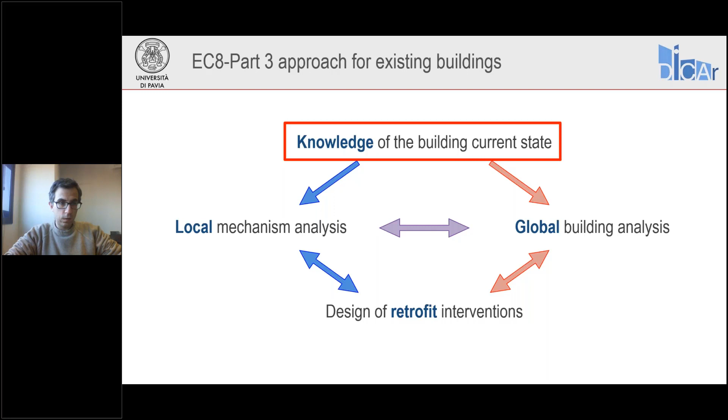So before looking at what Eurocode 8 is saying, I just want to point out why it is important to get knowledge of masonry buildings, and so why it is important to have a proper survey of the building. It is important because, differently from other building typologies, the seismic behavior of masonry buildings is influenced by a really large amount of quantities and factors. For example, it is influenced by the pattern, quality, and strength of masonry.

In particular, it is influenced by materials and by the interlocking between the materials and among the leaves, in case of masonry made by more than one leaf. It is also influenced by the load transfer to foundations, which is a function of the geometry, of plan or elevation irregularity, the distribution of vertical loads, and also a function of the thrust of horizontal elements like roofs, arches, or vaults.

The behavior is also influenced by the efficiency of connection among the elements, such as the interlocking among walls or the wall-to-diaphragm connections. And it is influenced also by the effect of strengthening elements, such as tie rods or ring beams, that can be present. Finally, it is influenced also by the interaction with adjacent buildings.

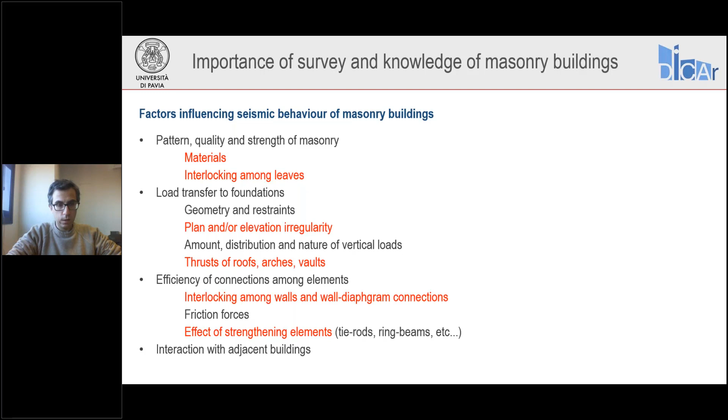Now here you can see some examples of damages during an earthquake due to these factors that I was mentioning. For example, on the left you can see some collapses due to disgregation of masonry, which is not good quality. On the right you can see some collapses due to instability of walls, which are made of double leaves having poor connection.

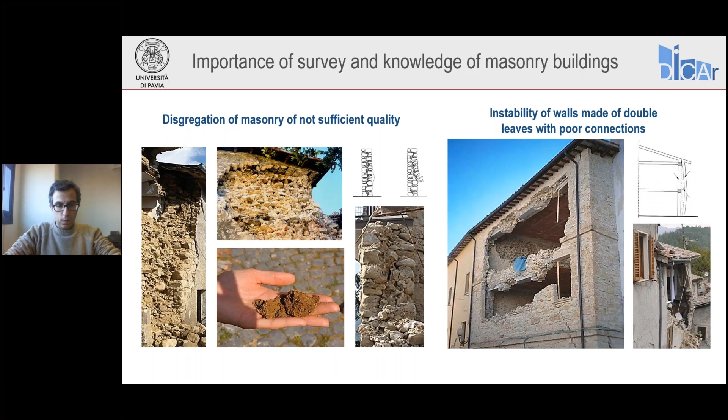Here you can see some effects, some failures due to problems of plan or elevation irregularity. For example, here you can see a collapse of the facade due to plan irregularity, because in this portion of the building there was a big room, so no transversal walls which could potentially act as a restraint of this facade. Here you can see some damages due to elevation irregularity.

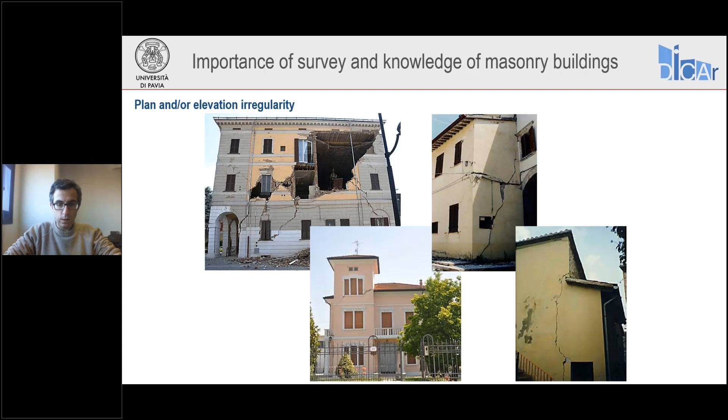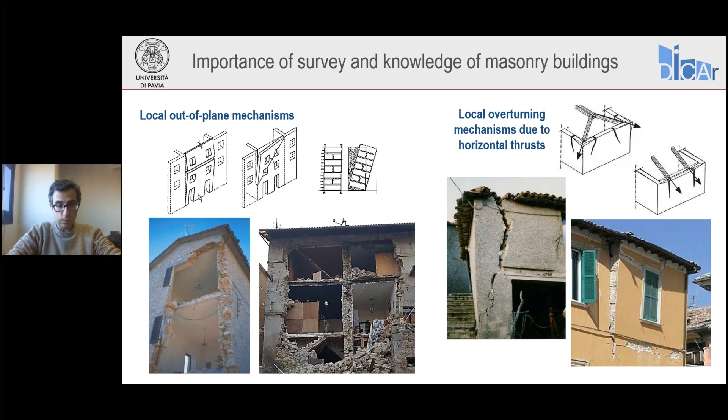Now, in these slides you can see some examples of local out-of-plane collapses, so collapses due to this kind of mechanism. Whereas on the right you can see the effect of possible horizontal thrusts. Here you can see essentially a collapse of a portion of masonry. Now, usually these are the mechanisms that are more commonly taking place in masonry buildings.

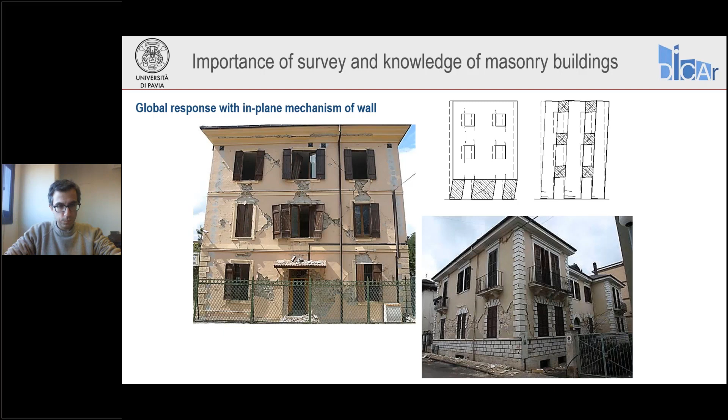Now, how is Eurocode 8 facing the problem of survey and knowledge. First of all, the Eurocode which is facing this problem is Eurocode 8 Part 3, which is the part of Eurocode devoted to assessment and retrofit of buildings.

Now the current version is the one of 2005, which consists of 90 pages, which can be a lot, but actually is not, because those 90 pages are not only relative to masonry buildings, but relative to all structural typologies. Now this code is actually under review, and it is very, very likely that there will be, first of all, a larger amount of information. So probably the new Eurocode will not consist of only 90 pages, but more pages.

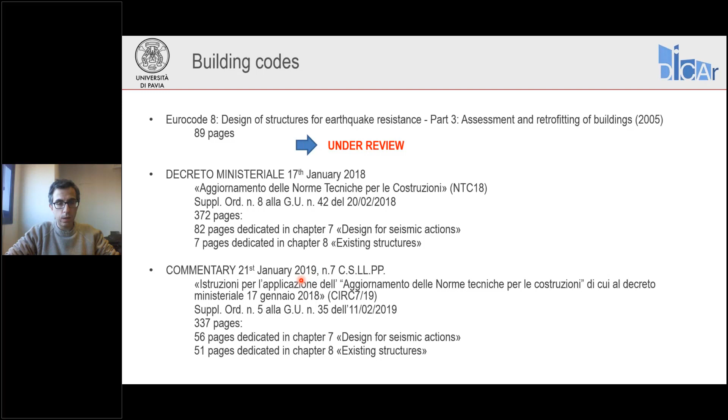And there will be aspects taken from other codes, such as the Italian code that has already been updated. The Italian code, which is the version of 2018, but also its commentary, which was released in 2019.

So what Eurocode 8 part 3 is, in the current version, saying about this problem. The problem of knowledge and survey is faced in chapter 3.

If you look at chapter 3, you can see different sections. The first section regards general information and history. In particular, Eurocode 8 is asking the engineer to collect information on several aspects. The most important are available documentation regarding that specific building, field investigation, and in situ and laboratory tests. It is also stressing the importance of cross-checks between the different sources of information, just to avoid different information from the different sources.

Then there is also a section called required input data, in which Eurocode 8 is setting a list of information to be collected. I want to stress that this section is relative to all structural typologies, not specific only to masonry. Here, Eurocode 8 is asking you to find information regarding the structural system, the dimension of the building, and the structural elements which are resisting the loads. It's asking you to collect information regarding the mechanical properties of the material, plus a list of other information such as possible material weaknesses, inadequate detailing, and so on.

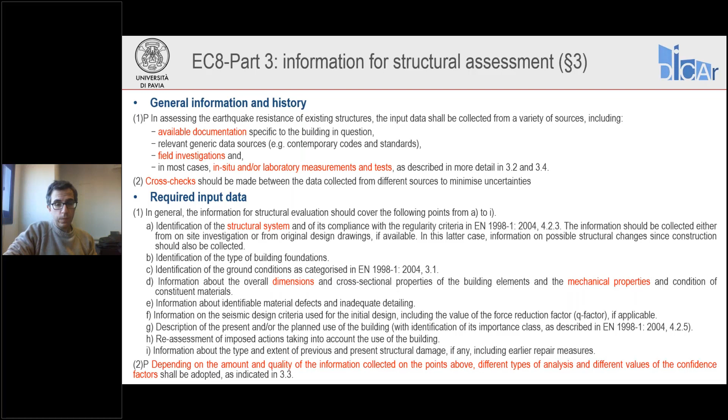Now, the most important sentence of this part is the last one, which says: depending on the amount and quality of information collected, different types of analysis and different values of the confidence factor have to be adopted.

Eurocode 8 is then introducing the concept of knowledge level. Knowledge level represents simply the amount of information, the amount of knowledge that the engineer is getting on the building to be assessed. There are 3 possible levels of knowledge, ranging from 1 to 3. KL1 is the limited knowledge level, KL2 is the normal knowledge, and KL3 is the full knowledge. So increasing the number means increasing the knowledge on the building.

The factors that are influencing the different knowledge levels are essentially 3: geometry, details, and materials. Now all this information is somehow summarized in this table, which is table 3.1, which I'm going to comment on here and in the next slides.

Regarding the geometry, of course, it is represented by the geometrical properties of the structural system. Details can include, regarding masonry buildings especially, connection between floors and diaphragms, connection between walls and diaphragms, property of joints, and for other structural typologies such as RC buildings, also detailing information regarding their reinforcement. The materials are represented by the mechanical properties of the material of the building.

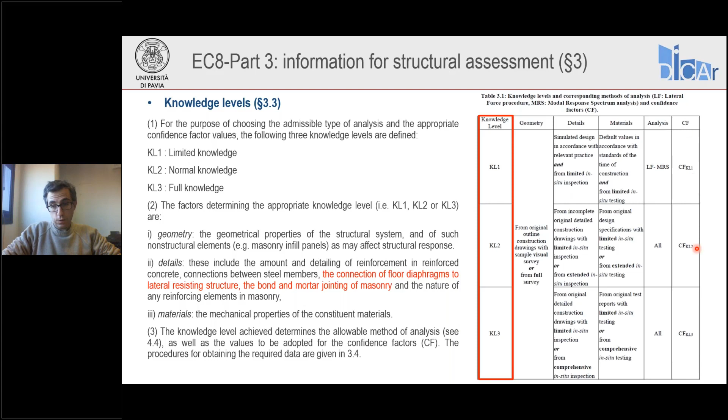Now, what is the meaning of knowledge level? The meaning is this: if you move from KL1 to KL3, you increase the extent of investigation, and so also the cost of investigation, but you reduce the uncertainties. So moving from KL1 to KL3, in theory, you're going to a less conservative assessment. It doesn't mean that moving from KL1 to KL3 you are necessarily increasing the cost, because potentially if you move to KL3, the amount of retrofit that you need can be less.

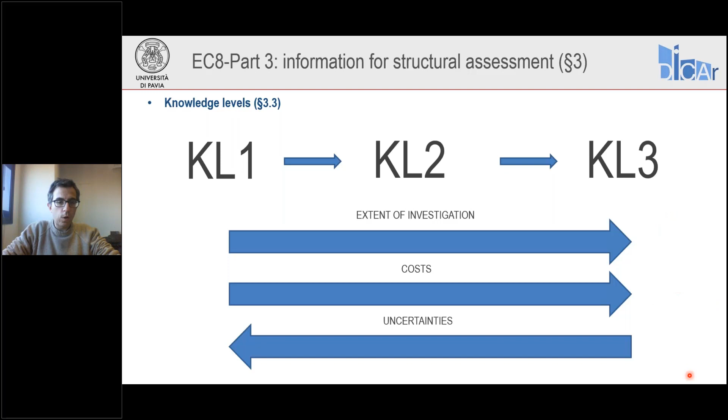So these are the costs of investigation, not the total cost of the interventions. Now it is the engineer that has to find a balance among all these aspects and select the proper knowledge level.

Now let's comment on table 3.1, looking at the different columns. Regarding the geometric survey, Eurocode 8 is introducing 4 definitions. Outline construction drawings are documents that can describe the geometry of the structure, allowing for the identification of the structural system, essentially, and the dimension of the different elements.

Then it is introducing the detailed construction drawings. These are essentially the same as the outline construction drawings, but in addition they have information regarding details. Then Eurocode 8 introduces the concept of visual survey. A visual survey is a procedure where the engineer checks the correspondence between the outline construction drawings and reality. He's not checking all the elements, but probably, for example, the dimension of the most important elements.

Finally, there is the concept of full survey. Full survey is like the visual survey, but is extended to the whole building, and the aim of this survey is to produce structural drawings. It is used when these kind of drawings are not available, or when you want to reach the full knowledge of the building.

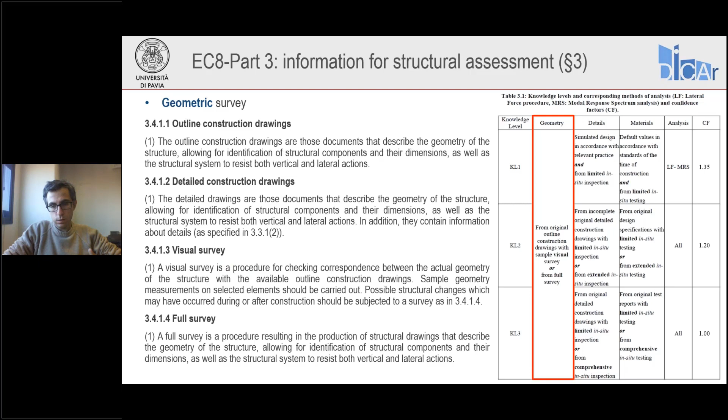Now, regarding the detailed investigation, Eurocode 8 is introducing the concept of simulated design, which consists in considering the code which was in force at the time when the building was constructed, and reperforming the design according to this code. This is particularly useful for reinforced concrete structures, because you can estimate the amount of reinforcement in case you don't have this kind of information.

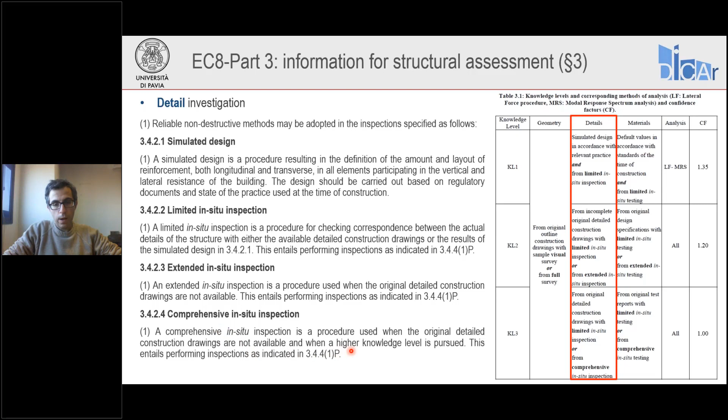Then there is the concept of limited in situ inspection, a procedure for checking the correspondence between the information on the details in the documents available and the reality. The extended in situ inspection is essentially like the limited one, but more extended, and is used when you don't have information on the details from original documents. Finally, Eurocode introduces comprehensive in situ inspection, which is like extended in situ inspection, but more extended still, and is used when you want to reach the highest knowledge level.

Now, moving to material characterization, Eurocode 8 introduces the concept of destructive and non-destructive tests. In particular, Eurocode says non-destructive tests have to be used, but also in addition to destructive tests, possibly.

There is then the concept of limited in situ testing. This is a procedure used when you have information on material properties coming from standards at the time of construction or from original documents. Extended in situ tests are performed when original design specifications regarding materials are not available. Comprehensive in situ testing is essentially an experimental campaign like the extended one, but again, more extended.

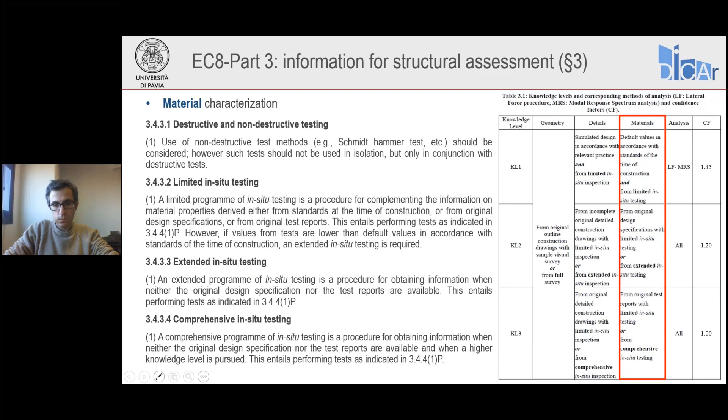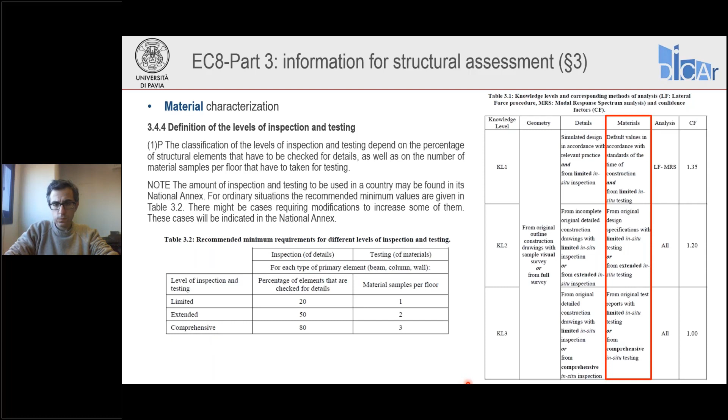Eurocode 8 then introduces the global analysis methods to be used in the assessment. It mentions linear elastic methods like equivalent lateral forces and modal superposition methods, and also nonlinear methods.

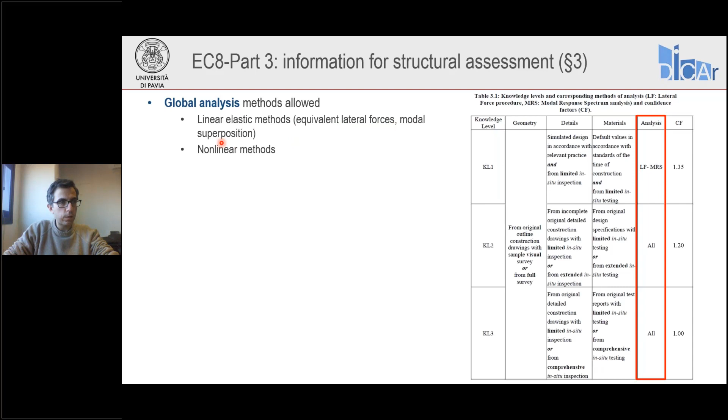Finally, it introduces the concept of confidence factor, a factor applied to material strength. This factor reduces as you increase the knowledge level. It is used in two ways: to reduce the mean strength when used to calculate capacities, which is the most common situation, but it can also be used to increase the mean strength in case of ductile elements, when these strengths are used to calculate the demand on brittle elements - typically used in a capacity design framework.

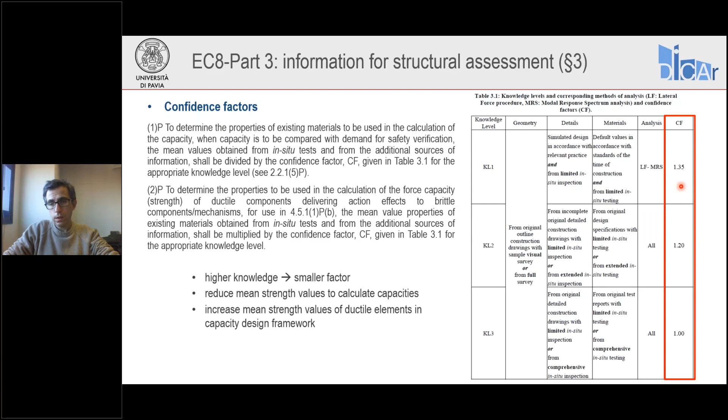The recommended values of these confidence factors are listed in this table, ranging from 1.35 to 1.

Now let's see what Eurocode 8 requires of the engineer, depending on the knowledge level selected. At knowledge level 1, Eurocode 8 asks you to obtain information regarding the geometry from original outline construction drawings, with also some visual survey. If these original construction drawings are not available, you have to perform a full survey. This part regarding the geometry is essentially common to all three knowledge levels, so I'm not going to repeat it for KL2 and KL3.

Regarding the inspection of details, Eurocode 8 asks you to perform a simulated design, and also to perform limited in situ inspections. Regarding the materials, you have to use some default values in accordance with the standards of the time, even though no indications are given by Eurocode 8 on these default values. You have to perform also some limited in situ testing. You have to use only linear methods and apply a confidence factor of 1.35.

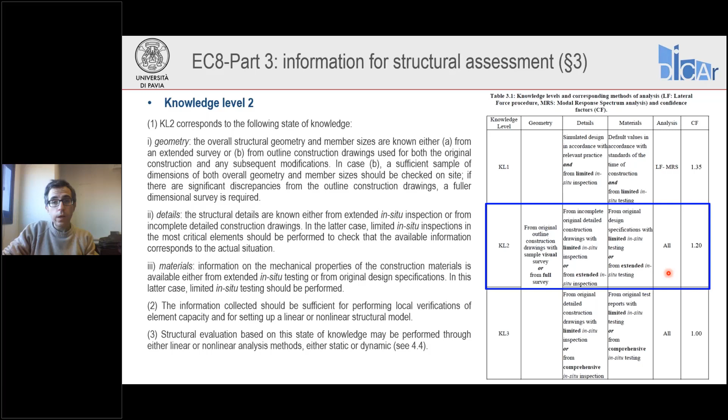Information on the mechanical properties of the materials has to be obtained from original design specification with limited in situ testing, or from extended in situ tests. Differently from KL1, all the methods of analysis, so linear and nonlinear, can be used.

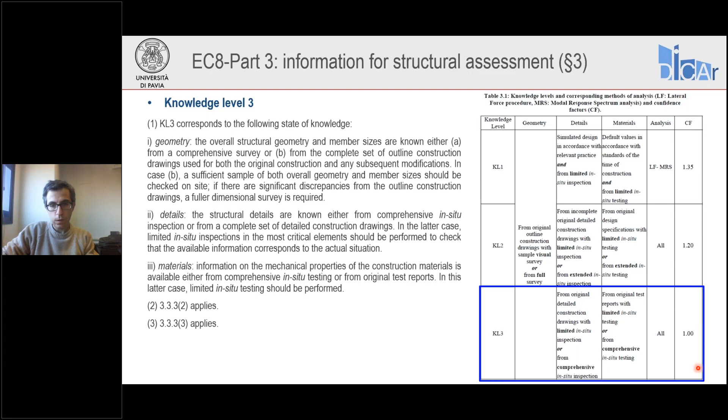Finally, at KL3, information on the details have to be obtained from original construction drawings with limited in situ inspection, or from a comprehensive in situ inspection. Information on the mechanical properties has to be obtained from original reports with limited in situ testing, or from a comprehensive in situ test campaign. Again, all the analysis methods can be used, and this time the confidence factor is 1.

This information that I was discussing before is somehow valid for all the structural typologies. So now the question is: is there specific information regarding masonry buildings? Yes, and we have to look at Annex C of Eurocode 8 Part 3.

Here there's a first section regarding general aspects, where the code is asking the engineer to look for information regarding the type of masonry units, the connection between the elements, and of course the properties of materials.

Regarding the geometric survey, the code is asking the engineer to look for information regarding the size and location of the shear walls that are resisting the seismic load, the dimension of the units, and the location and dimension of the openings. Now these are quite straightforward information.

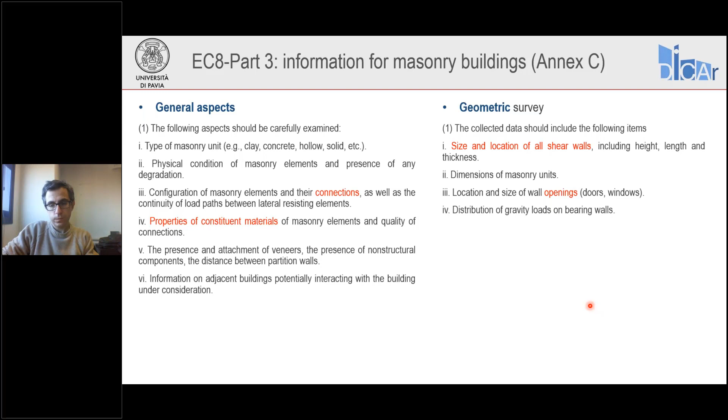Regarding the investigation of the details, the code is suggesting to check a list of different aspects. The most important are the quality of the mortar, the identification of the number of leaves in case the masonry wall is made by more than one leaf. It is asking you to find information regarding the connection between the orthogonal walls, and the connection between the vertical walls and the horizontal elements, such as floors or roof.

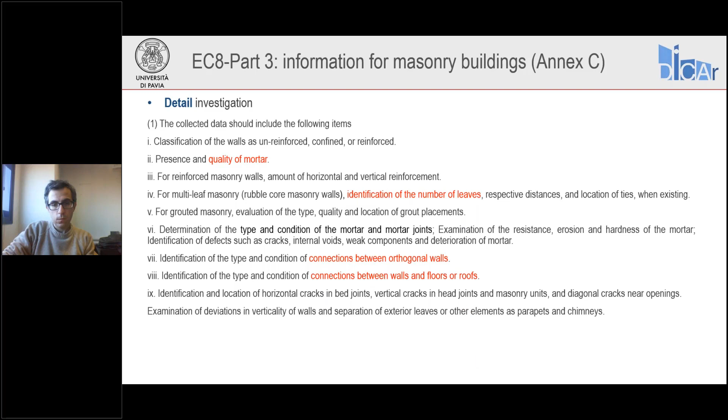Finally, regarding material characterization, the Eurocode is stressing the importance of non-destructive testing. There is also a list of possible non-destructive tests to be performed, which are ultrasonic tests, impact tests, radiography. And it is stressing also the importance of destructive tests, or moderately destructive tests, which should be used additionally to the non-destructive tests.

Possible moderately destructive tests are flat jack tests, which can be used to measure compressive strength or also shear strength, diagonal compression tests, or large-scale tests.

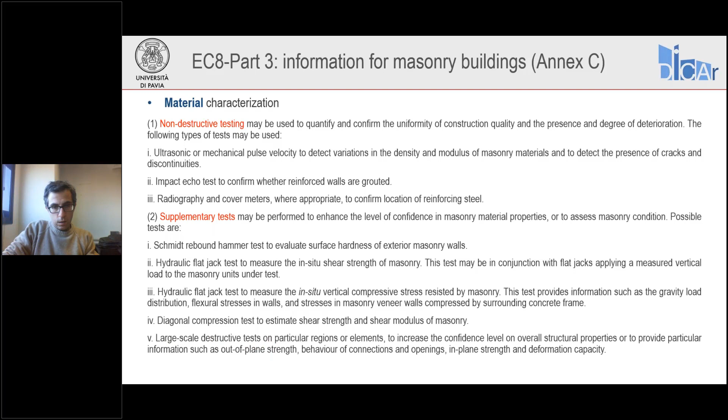Now we'll try to describe some tests or procedures to get information on different aspects. First of all, to get information on the geometry and on the details, you can use some non-destructive procedures such as thermography and endoscopy. Thermography consists of using thermal cameras, which are able to find discontinuities in a building, used to see, for example, if there are different masonry typologies in the building, if there's degradation of materials, or if voids are present.

Endoscopy consists in essentially creating a very small hole and putting a camera inside so that you can see portions of the building which are hidden, which are not visible. So you can check voids, you can possibly look at the wall section, floor section, and so you are getting information on both geometry and details.

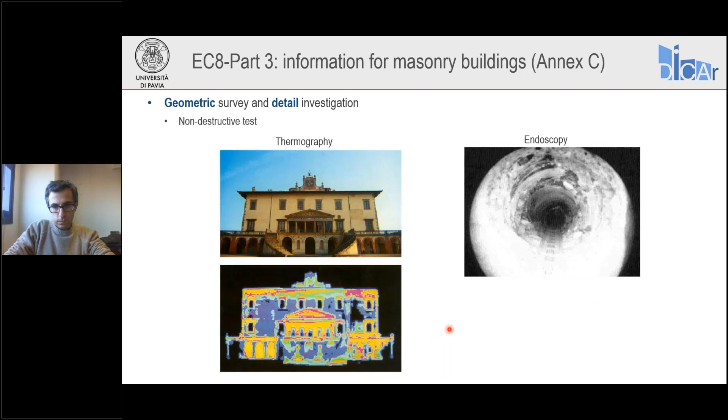Regarding material characterization, I've mentioned there are some non-destructive tests, and there are moderately destructive tests. One of the most common moderately destructive tests is the flat jack test, the in situ flat jack test. It can be performed with a single jack, and in that case you are able to measure only the compressive stress acting on the pier, or it can be performed with 2 jacks. In that case you are able to measure the elastic modulus and possibly also the compressive strength.

How does it work? You are required to perform a cut, a horizontal cut in the masonry.

If you do another cut and put inside another flat jack, you can somehow control the state of this portion of masonry. You can increase the axial load acting on it, and draw the stress-deformation curve.

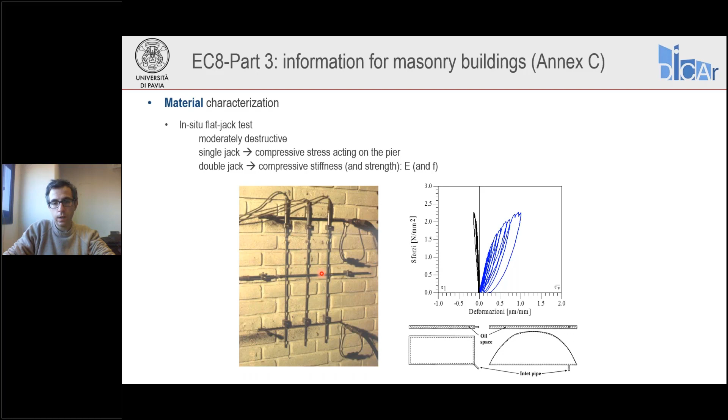The second test is the in situ shear test. It is similar to the flat jack test, so it's moderately destructive. It is used for regular masonry made of bricks or blocks having weak joints, because the goal of this test is to measure the strength parameters of the joints, so the initial shear strength and the friction coefficient.

How does it work? You are required to perform two cuts, and inside each cut you have to put a flat jack. In this way you can apply an axial load, controlling the axial load acting on this portion of masonry.

So in this way, if you move to a plane of shear stress versus axial stress, you can get a point. Varying the axial load and repeating all the tests, you can get different points. At the end, interpolating the results, you can get information on the initial shear strength and on the friction coefficient.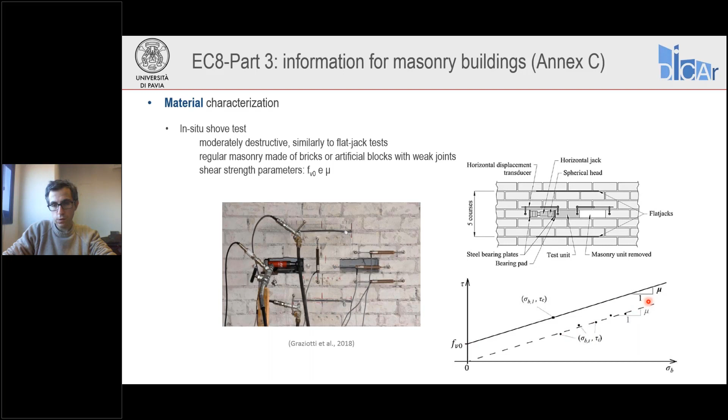Another test is the in situ diagonal compression test. This is, as you can see from the picture, a quite destructive and invasive test, because you are required to isolate a wall panel and put a diagonal actuator, which is used to apply a diagonal force.

It is used for regular masonry with strong joints, and is used to measure shear stiffness and strength parameters, so tau 0 and G.

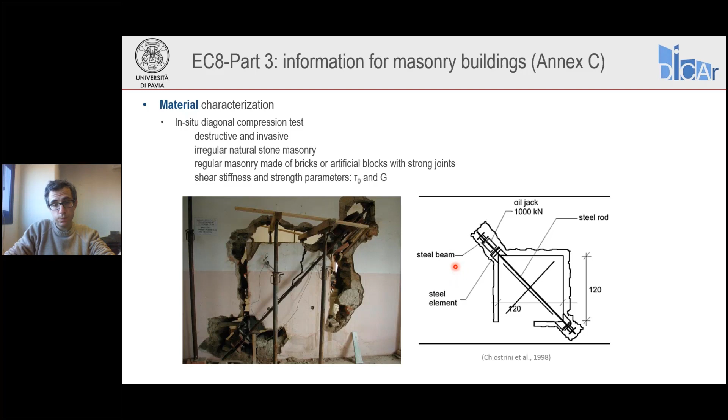As I was saying, you apply a diagonal load up to the failure of the panel. Once you know the load corresponding to failure, through simple expressions, you can get information on these parameters.

Another highly destructive test is the in situ shear compression test. It can be used for all types of masonry, and again it can be used to obtain information regarding shear stiffness and strength parameters. How does it work?

You have to isolate a panel, apply a vertical load, and then a horizontal force up to the failure of the panel. Again, once you reach failure, you can get information through simple expressions on the strength parameters, depending on the masonry typology and on the type of failure that you are attaining.

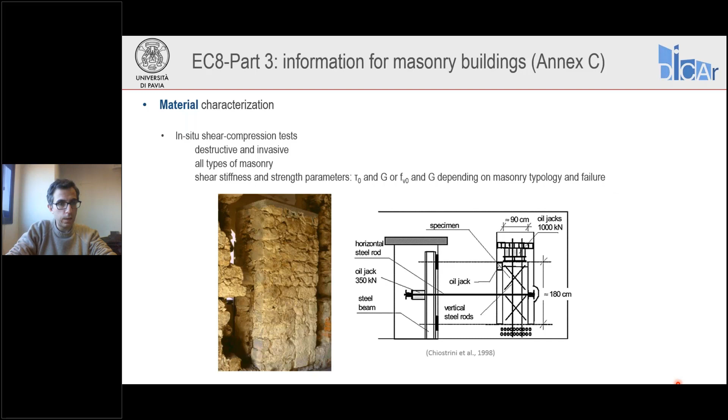The last test that can be used this time is not an in situ test, but a laboratory test. It's called the direct shear test.

It is moderately destructive because you are required to extract from the building a sample made of three bricks and the joints in between. You extract this sample, bring it to the laboratory, and apply an axial force orthogonal to the joints, plus a load parallel to the joints.

Now, as for the shove test, you are able to obtain a point in the plane of horizontal stress versus vertical stress, and by varying the axial force you can get different points. Again, by regression, you can obtain information on Fv0 and the friction coefficient.

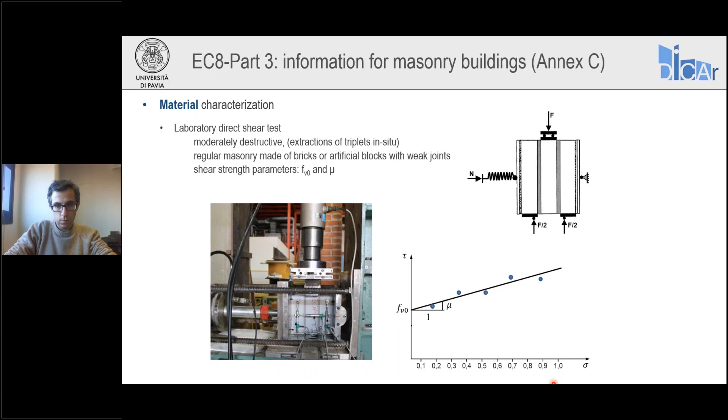Now, what I would like to stress here is that not in all cases are the parameters you get from in situ or lab tests the parameters you have to use in the structural analysis. For example, if we consider the initial shear strength Fv0, the test we were mentioning before allows you to obtain information on the strength of the joint.

But if you are doing a structural analysis, for example using equivalent frame approaches such as Tremuri, the Tremuri software requires you to use strength criteria of the elements, which depend on the shear strength of the panel. Now, these two parameters are not the same.

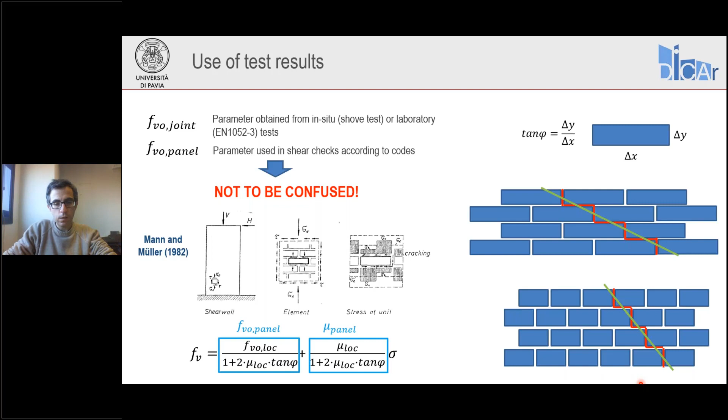The difference between these two parameters is explained in the theory of Mann and Müller. Essentially, the relation between the strength parameters of the panel and the parameters of the joints are represented by these expressions. What I would like to stress is that this expression depends on the tangent of phi parameter, which is the inclination of the crack that can form in masonry. This inclination can be different if the pattern is different. So at the end, you can have the same masonry with same mechanical parameters, same dimension, same axial load, but the strength can be different depending on the pattern.

Now I would like to talk about some additional issues that are not currently in the current version of Eurocode 8, but will probably be introduced in a future review of the code. Essentially, these are taken from the Italian code, which has already been updated, as I was mentioning before.

The first issue regards the reference values of mechanical parameters. If you remember, I was saying that Eurocode 8 asks you to use information from standards at the time of construction, but doesn't actually give information on these standards. So the Italian code does what it does: it gives an interval of variation for mechanical properties for the different masonry typologies.

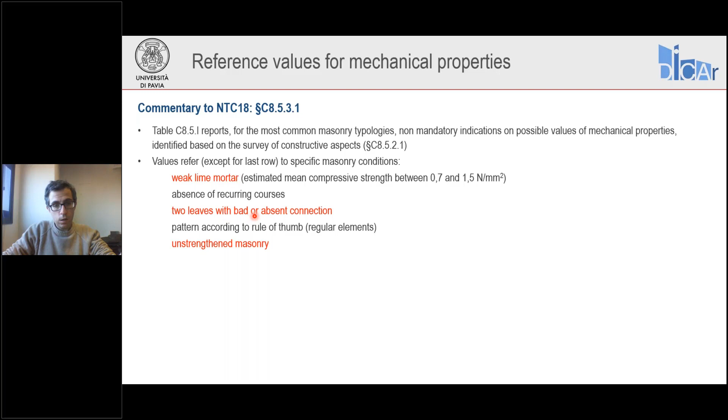These intervals of variation are valid in particular conditions, such as masonry with weak lime mortar, two leaves without good connection, and unstrengthened masonry. So this is the table of the Italian code with the different masonry typologies and the intervals of variation.

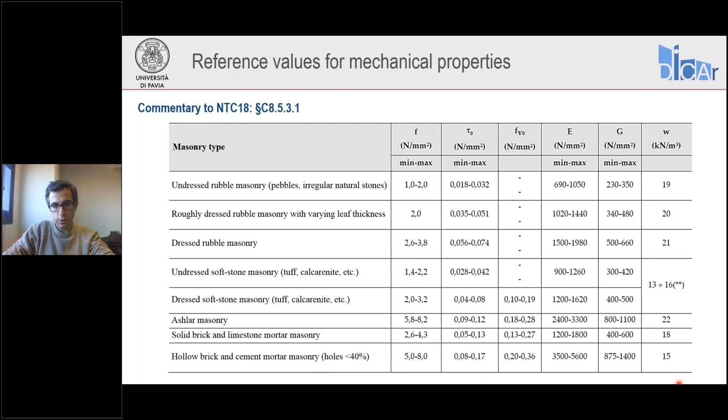The Italian code is also stressing the importance of some aspects. For example, if you have a double leaf masonry, the Italian code draws attention to the fact that the outer leaf can be very vulnerable. So it suggests reducing strength and stiffness parameters of the outer leaf if it is not well connected to the inner leaf.

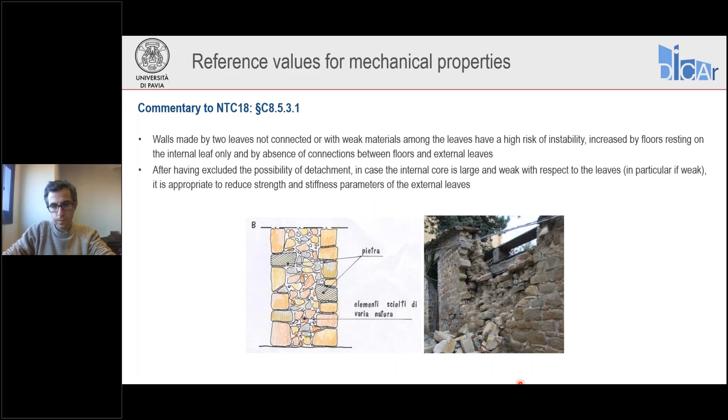Now, what do we have to do if masonry actually has better condition than the reference one? If masonry has better condition, you can still apply the interval of variation of the table, but you are required to increase these values using correction coefficients, which differ depending on, for example, whether the mortar has good quality, or there's presence of recurring courses, or presence of transversal connection elements.

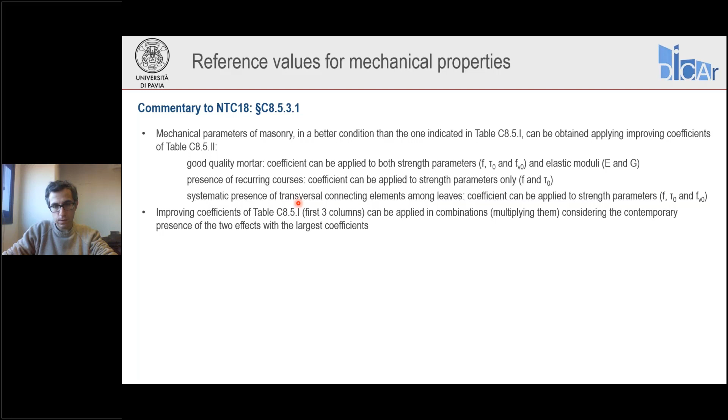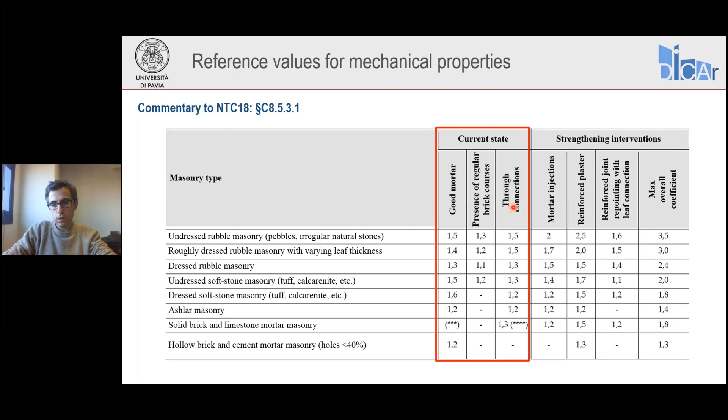Here you can see examples of these correction coefficients. There are essentially three types of correction coefficient. You can apply a maximum of two of them, using the ones giving the largest effect. If masonry has some strengthening interventions, you can again use the same values of the table, but applying another set of correction coefficients.

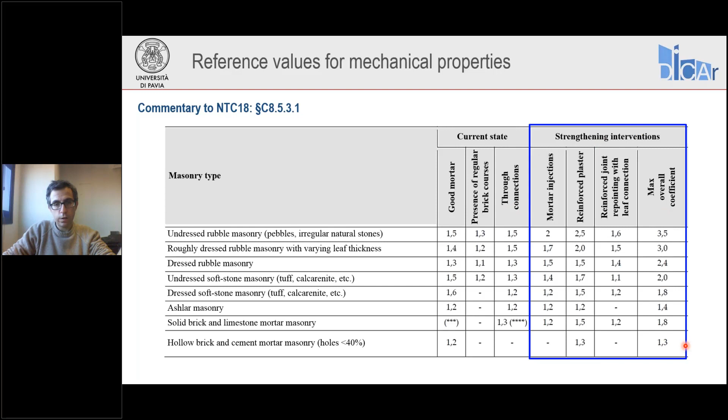The second issue regards the possibility of updating the knowledge of material properties based on experimental results. At the highest knowledge level, knowledge level 3, you have information on mechanical properties coming from the table I discussed before, or from code standards, and also information coming from tests, because you performed some experimental tests. So the idea is to combine both pieces of information, which can be done by a strategy called Bayesian updating.

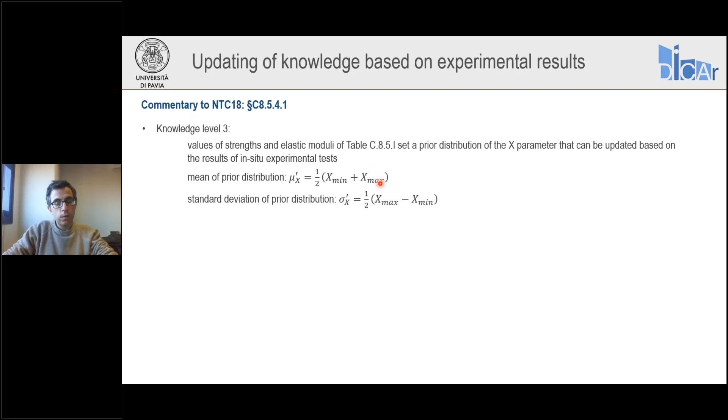How do you perform this update? First, you have to define a prior distribution, a probabilistic distribution defined by the mean and the standard deviation. Both these parameters are functions of x min and x max, which are the extreme values of the interval of variation of the table. You are then required to apply these quite simple formulas to obtain the updated value of the mean.

This formula is a function of the mean of the initial distribution, of the number n of tests that you performed, of the average value coming from the test, and also of this k parameter, which represents the weight of the prior distribution, so of the information coming from the table with respect to the experimental test. This formula has to apply to each mechanical property, not to all of them, but to the mechanical properties on which you have experimental information.

The code also points out that if you have a large difference between this value and the one coming from the prior distribution, you have to use this formula consciously. So you have to give a motivation for the use of this formula.

Now, with the increase of the number of tests, this final mechanical property tends to be nearer to the average of the experimental tests, because the weight of the experimental tests tends to increase.

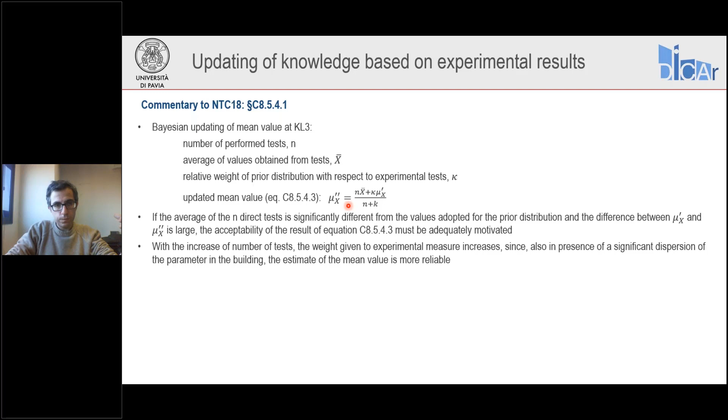In this table you can see the values of the k parameter depending on the typology of test that you are performing, and also depending on the parameter that you are measuring.

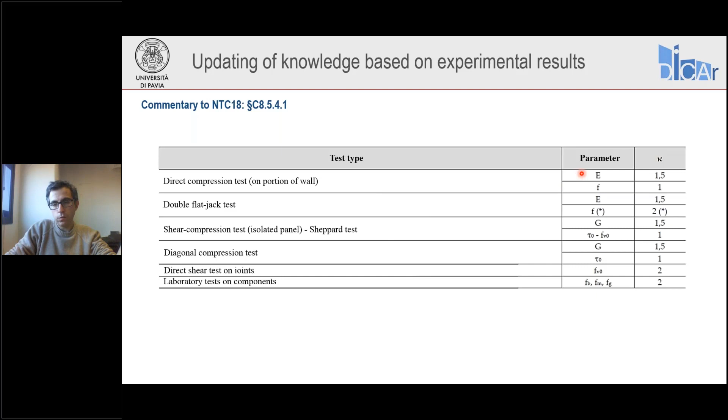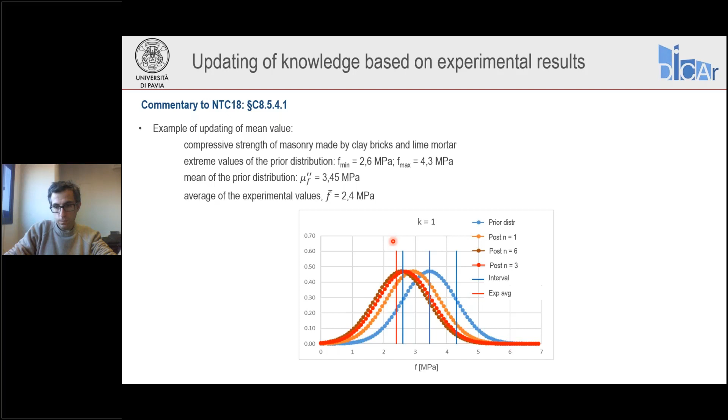To conclude this presentation, I would like to briefly mention an extended in-situ test campaign in which we, as University of Pavia, were involved in recent years. The problem was the seismicity induced by gas extraction in the northern part of the Netherlands. I think there will be a webinar dedicated to this topic, but here I will briefly mention the problem.

What happened was that in this area of the Netherlands, the building stock was mainly made of unreinforced masonry buildings, which had not been designed to withstand earthquakes, because natural seismicity is not normally an issue in that area. But a series of earthquakes happened due to these gas extractions. Luckily, the magnitude was quite reduced, but these buildings were somehow vulnerable to this seismicity.

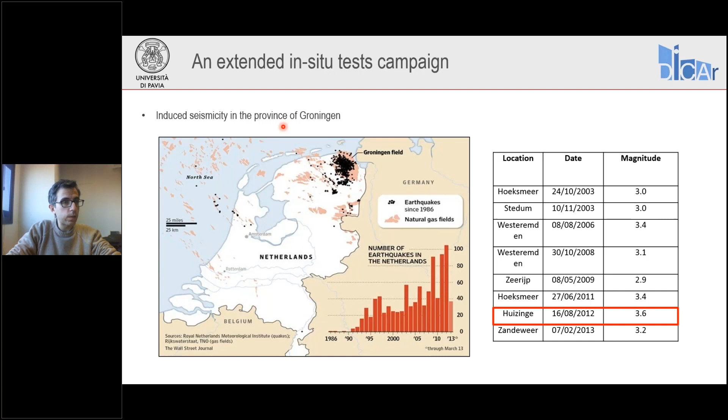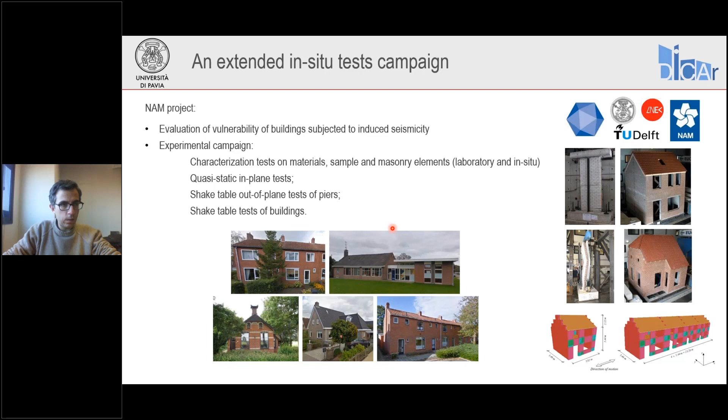So there has been a huge project dedicated to studying the vulnerability of these buildings. This project consisted of a large experimental test campaign, including laboratory tests on components but also on entire buildings, as well as numerical simulations using, among other software, Tremuri, and also a quite large in-situ experimental test campaign. Here you can see some of the buildings that were tested.

The new aspect of this test campaign was that we were able to obtain a large number of results, because usually you're not performing a wide number of tests when doing an in-situ test campaign. This information also allows us to possibly obtain information regarding the correlation among the mechanical parameters inside a building, also with respect to the total buildings that were tested.

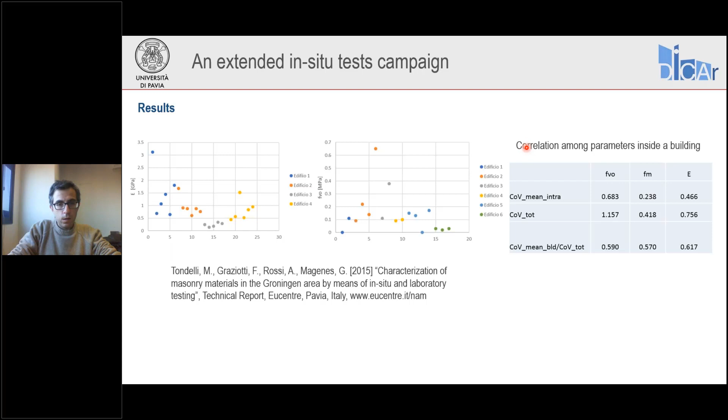So with this, I think I have concluded my presentation. I have said more or less everything that I wanted to say. I want to thank you for your attention.